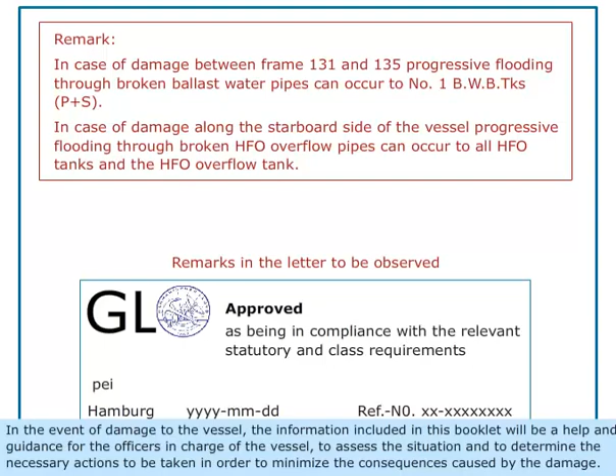In the event of damage to the vessel, the information included in this booklet will be a help and guidance for the officers in charge of the vessel to assess the situation and to determine the necessary actions to be taken in order to minimize the consequences caused by the damage.

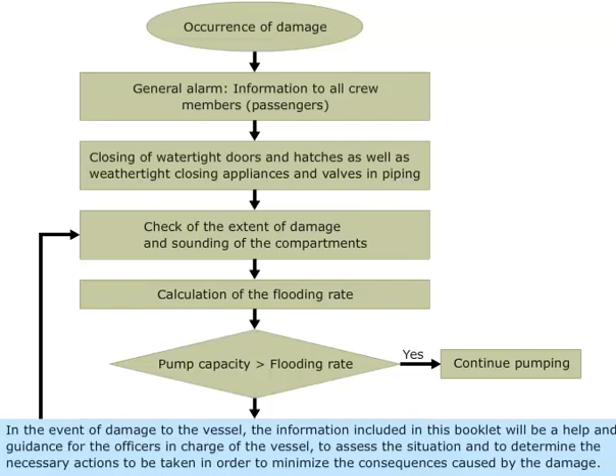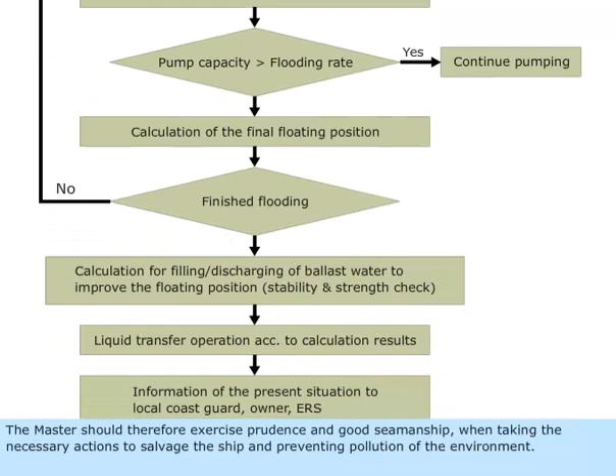The procedures given in this booklet are guidance only. The master should therefore exercise prudence and good seamanship when taking the necessary actions to salvage the ship and preventing pollution of the environment.

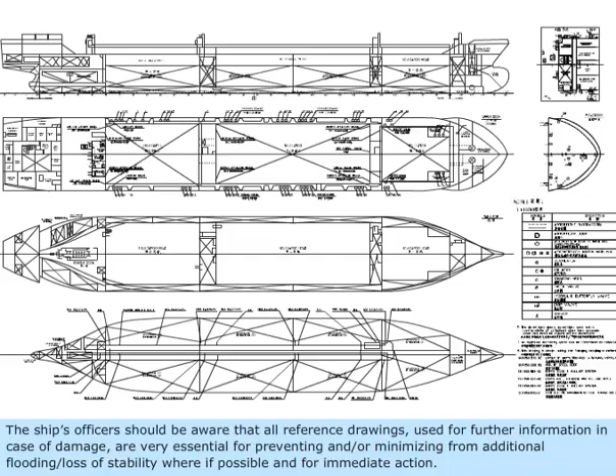The ship's officers should be aware that all reference drawings used for further information in case of damage are very essential for preventing and/or minimizing additional flooding or loss of stability, where possible, and for immediate action. Therefore, all reference drawings as shown should be kept in the proper place and shall be easily accessible.

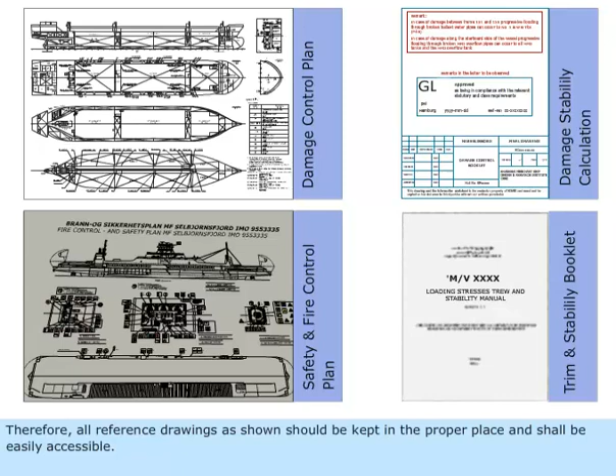Contents of Damage Stability Booklet.

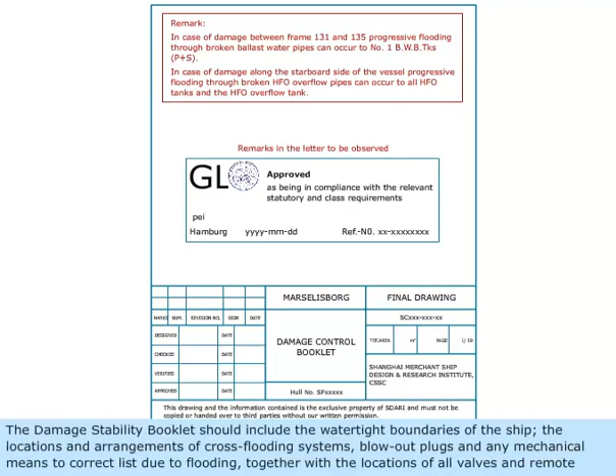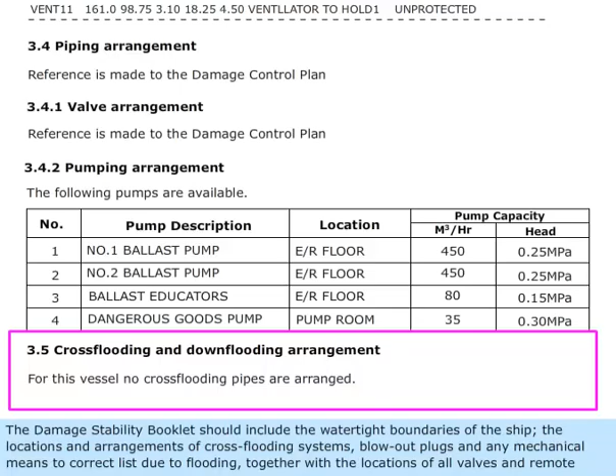The Damage Stability Booklet should include the watertight boundaries of the ship, the locations and arrangements of cross-flooding systems, blowout plugs, and any mechanical means to correct list due to flooding, together with the locations of all valves and remote controls, if any, the locations of all internal watertight closing appliances, the locations of all doors in the shell of the ship.

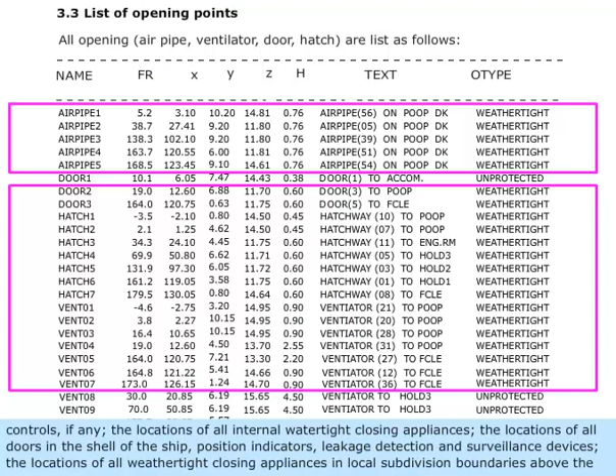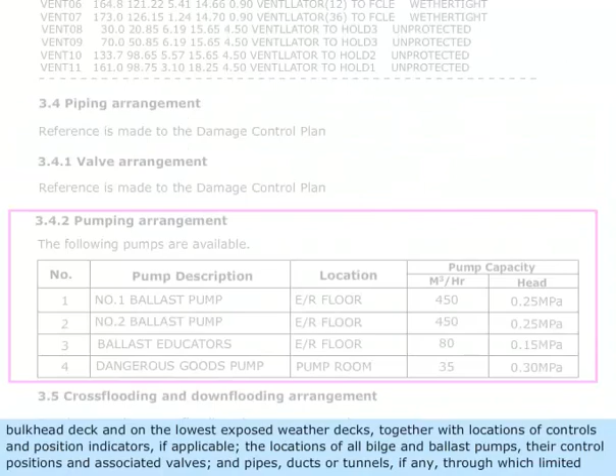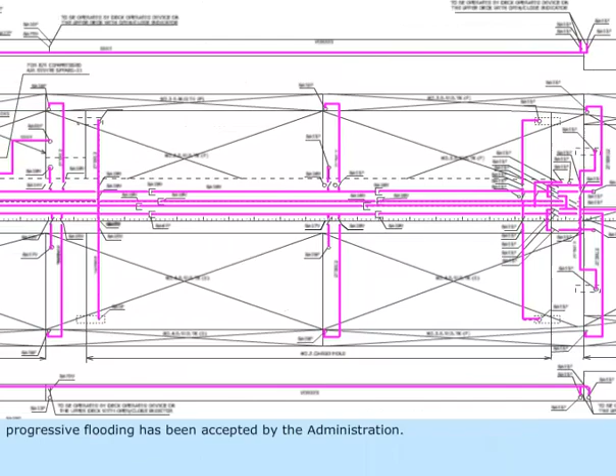Position indicators, leakage detection, and surveillance devices, the locations of all weathertight closing appliances in local subdivision boundaries above the bulkhead deck and on the lowest exposed weather decks, together with locations of controls and position indicators if applicable, the locations of all bilge and ballast pumps, their control positions and associated valves, and pipes, ducts, or tunnels, if any, through which limited progressive flooding has been accepted by the administration.

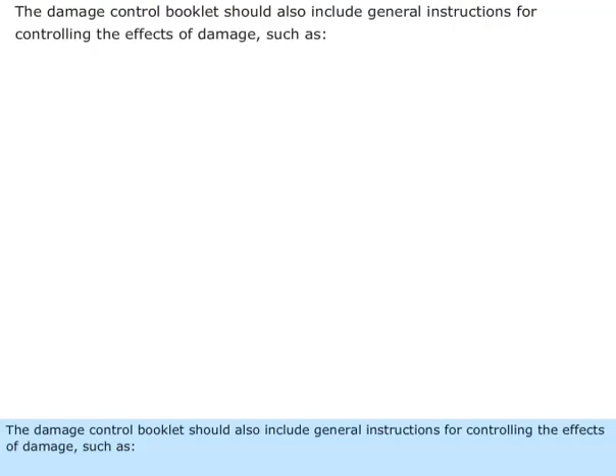The Damage Control Booklet should also include general instructions for controlling the effects of damage, such as commencement of the general alarm alert, and closing of hatch covers, valves, weathertight and watertight doors.

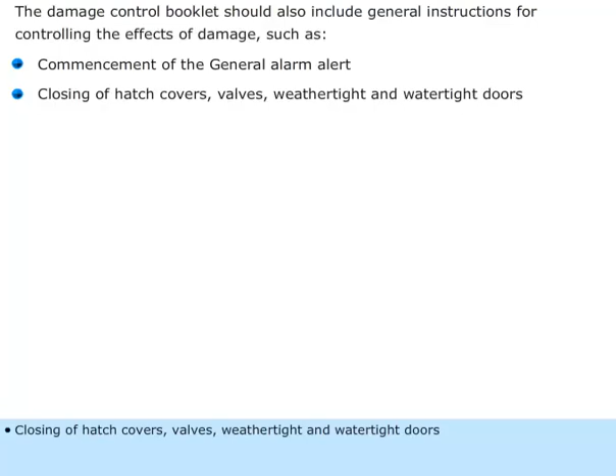Check the extent of damage and check sounding of the compartment, calculate the flooding rate. If pump capacity is more than the flooding rate, then continue pumping. If pump capacity is less than the flooding rate, then calculate the final floating position.

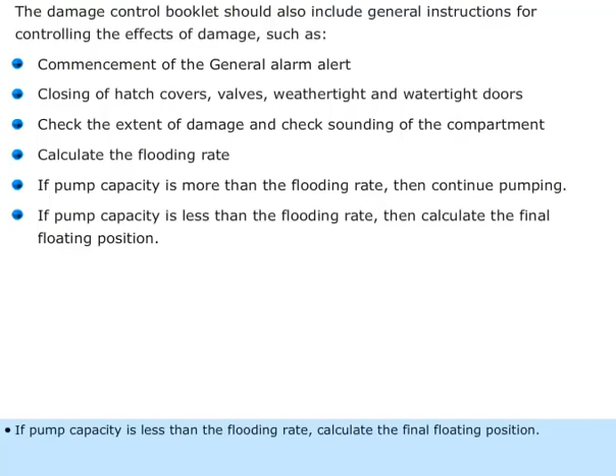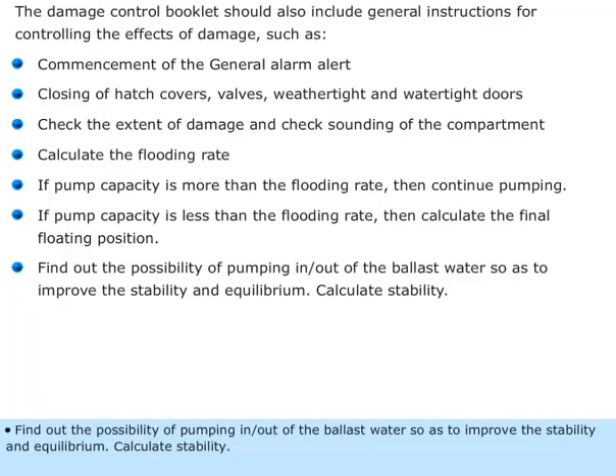Find out the possibility of pumping in or out of the ballast water so as to improve the stability and equilibrium. Calculate stability. Carry out the liquid transfer operation as planned.

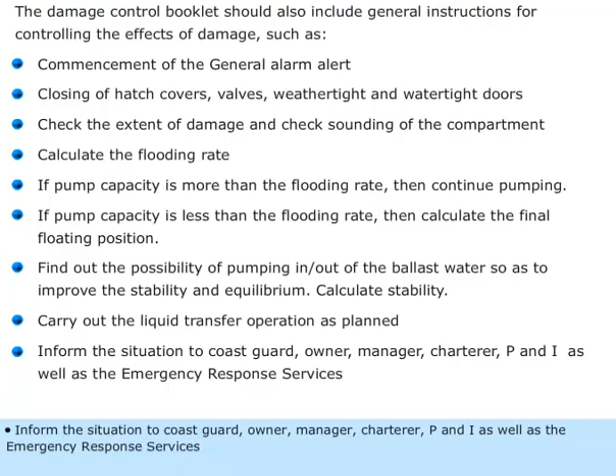Inform the situation to Coast Guard, owner, manager, charterer, P&I, as well as the Emergency Response Services. Follow the guidance of the Emergency Response Service to stabilize the vessel.